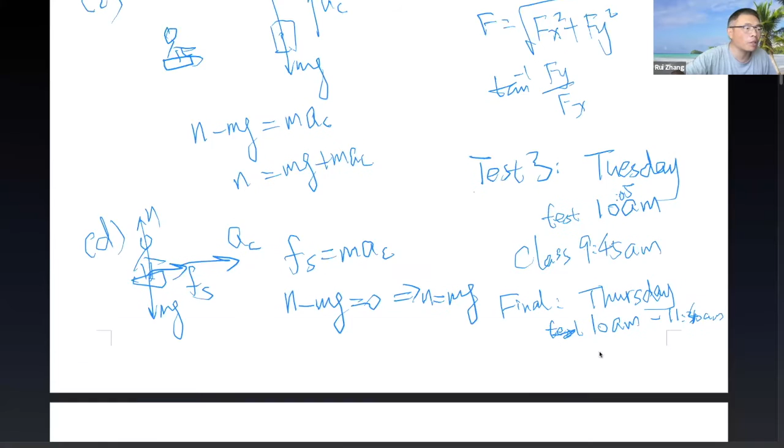So if you look at the book, chapter 9, the title is fluid and solids. Roughly speaking, the first section talks about states of matter, then two quantities called density and pressure, then pressure difference and buoyant force, fluid motion, and other applications. Up to here is all about fluid, and then the last three sections talk about solid.

So in this class, I'm going to talk a little bit about the fluid, to give you guys an outline about what the fluid is about. I'm going to try to use the rest of today to do that.

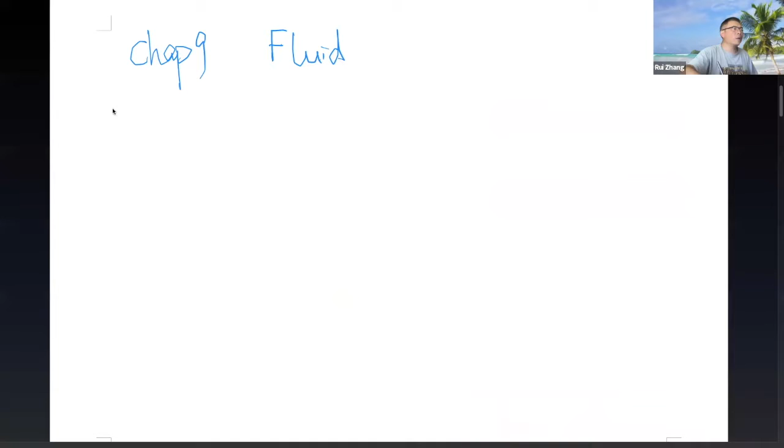So let me talk about fluid. First thing, we need to talk a little bit about the states of matter. It turns out that for the same kind of material, it can stay in different states. A very good example is a very common material we have every day, which is water.

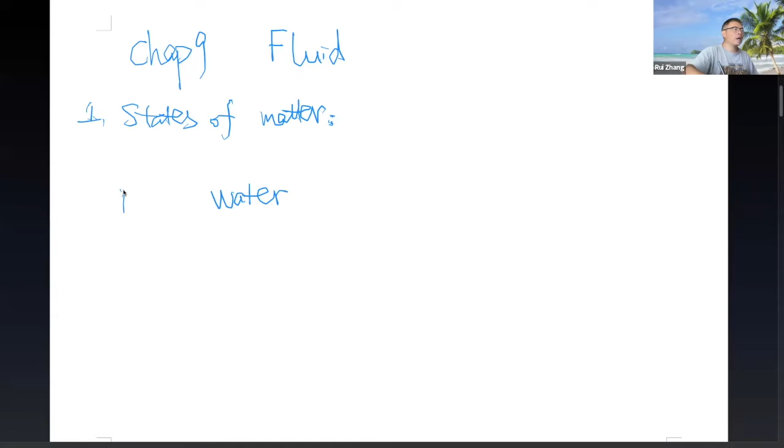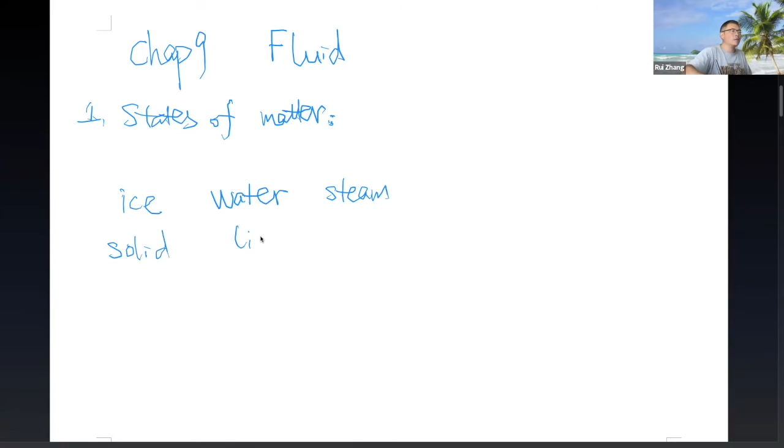As we know, if you put water in the freezer, it becomes ice. And if you put water on top of a stove and heat it up, it becomes steam. So these are the same object, same material, but different states. This is called solid, this is called liquid, and this is called gas. These are the 3 common states of matter. Sometimes they're called phases, so you could say every material has at least 3 different phases: solid phase, liquid phase, and gas phase.

These two together, liquid and gas, are sometimes called fluid. So when they talk about fluid, they mean liquid and gas. And then we have also solid here.

Now what induces this change of states is the temperature. As you increase the temperature, material will go from the solid phase to liquid phase and to the gas phase. This is true not only for water, but for everything else as well. Like the metals you use, they are solid at room temperature, but if you increase the temperature a lot, like to a couple thousand degrees, it's going to melt to liquid, and if you increase even higher, it's going to become gas. So all materials are like that, it's just the different temperatures at which this phase transition happens are different.

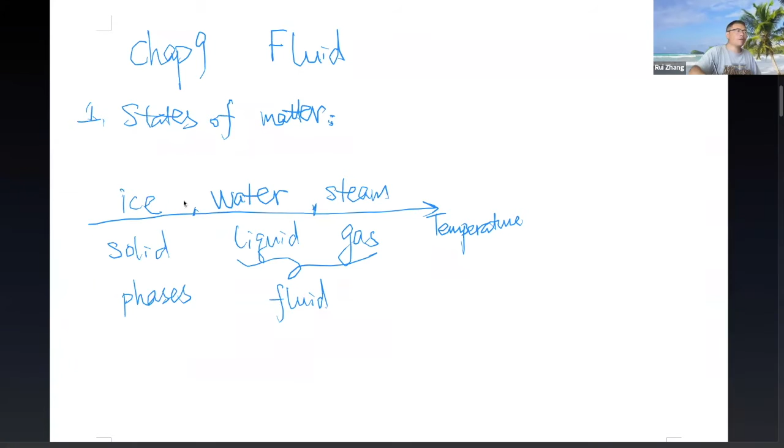So anyway, we don't need to know a whole lot about this. There's definitely physics you can talk about here, this is related actually to chapter 10, chapter 11, chapter 12, when we talk about thermodynamics and thermophysics, they're related to temperature. What determines these phases essentially is the microscopic interactions between the atoms or molecules in the material. As temperature goes up, those molecules move faster and faster, so it breaks those solids into liquid and then into gas.

Anyway, let's talk a little bit about fluid. So to study fluid, basically it's liquid and gas. There are two fundamental quantities we need to introduce, they're called density and pressure.

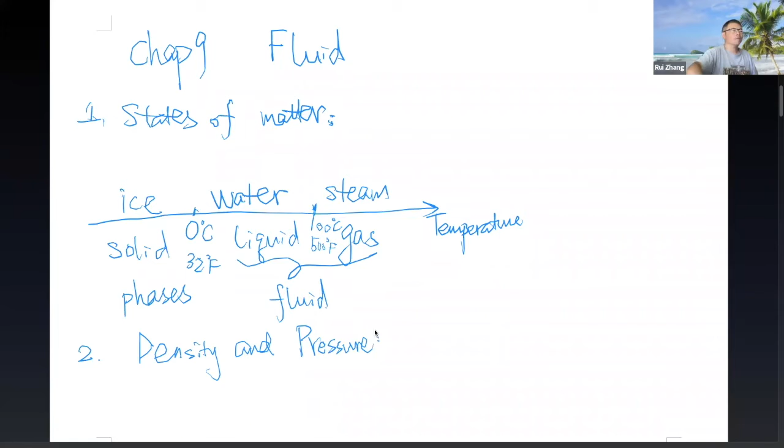So the definition of density is pretty simple. Normally people use rho - it's not P, it's a Greek letter, rho, okay? Defined as rho equal to m over v, mass divided by volume.

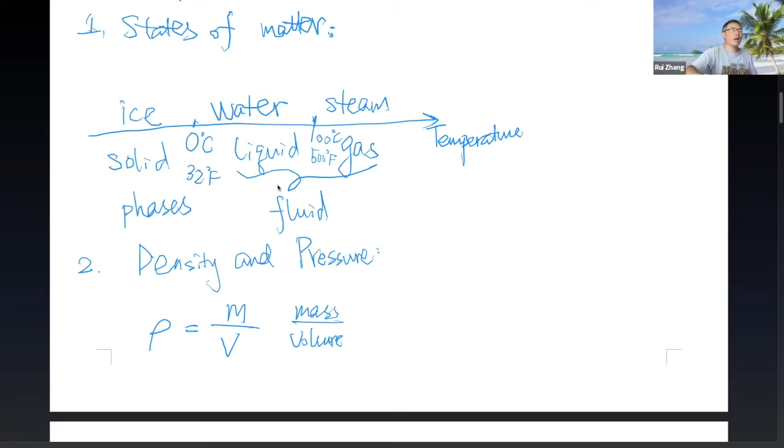So density basically is a mass per unit volume thing. And as the definition suggests, it tells you how dense the material is. So if you have the same volume, the bigger mass you have, the denser the object is. Mass is in kilogram and volume is in meter cube, so the unit for density is kilogram per meter cube. It is a scalar because there's no direction associated with it.

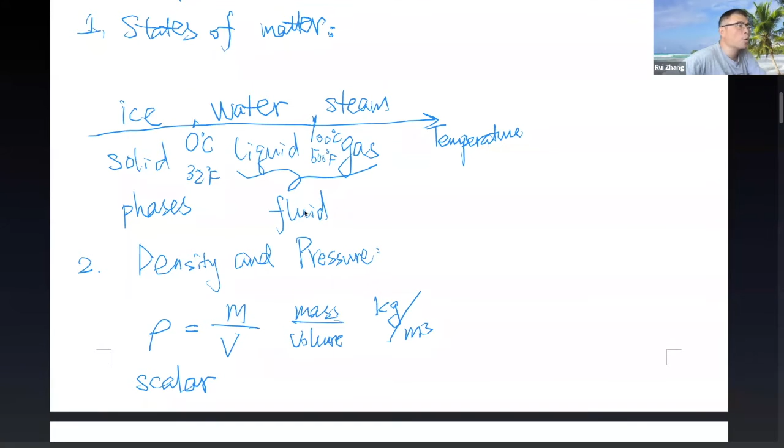Okay, let's go back to this. So this is the first quantity, density - a very useful quantity to describe the property of fluid. And the second quantity we need is called pressure, denoted by the letter P. It's defined as force per unit area.

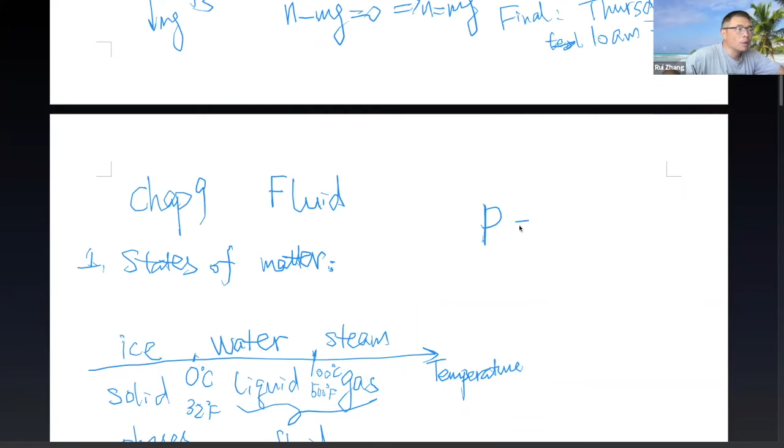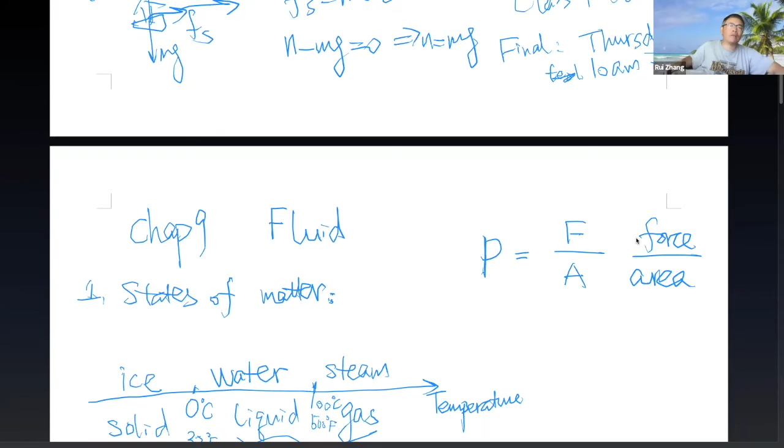So we have force divided by area here. When we talk about pressure, it's kind of like force, but it's not the force - it's force per unit area, so it's like how much force you apply to a specific unit area. This is a very good quantity to have because it tells you the property of the material, like how sustainable it is to pressure, to force. The unit for force is Newton, unit for area is meter square, so it's Newton per meter square. There's a special name for that - it's called Pascal, which comes from a physicist that studied a lot about pressure.

So how do we understand why pressure is very important for us? For example, think about this: you walk where there's snow on the ground. Now you try to walk on the snow - if you just walk barefoot, or with normal shoes, you see that your feet go into the snow.

If you wear a ski board or something, you're going to stay on top of the snow. What's the difference? In both cases, the force on the snow is basically equal to your weight. Actually, in the ski case, you have even slightly larger force because there's the weight of the ski as well.

But why do you sink into the snow in the first case while you don't in the second? It's exactly because of pressure. Same force, but the contact area in the first case is just the surface of your shoes, while in the second case you have the ski board, which is way larger. So the pressure in the second case is way smaller than the first case.

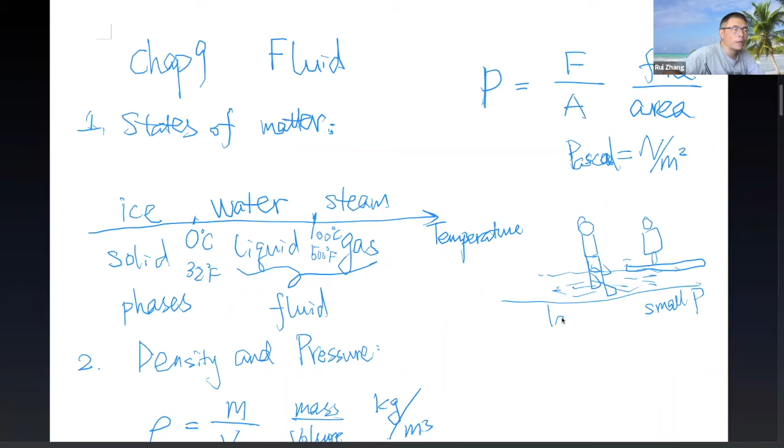Another interesting example is the so-called bed of nails. If you go to a science museum, like in Oklahoma City, and some other museums, they have a bed of nails you can use. The idea is you have a bunch of nails that make up a bed like this, and you can definitely lie onto it.

You can lie on it like this, and even though they're nails, they do not go into your body. It's because your whole weight is spread out. If you add up all the surface areas of all the nails together, they have a pretty decent total surface area, so the pressure is not actually very large. So you're good.

Now consider another case: imagine you only have 2 nails underneath yourself. As you can imagine, this is not going to end up good - you'll probably get some blood or something, because instead of having thousands of nails underneath, you only have 2. The surface area is significantly smaller than before, so this is not good. This is a really large pressure case, versus small pressure in the other case.

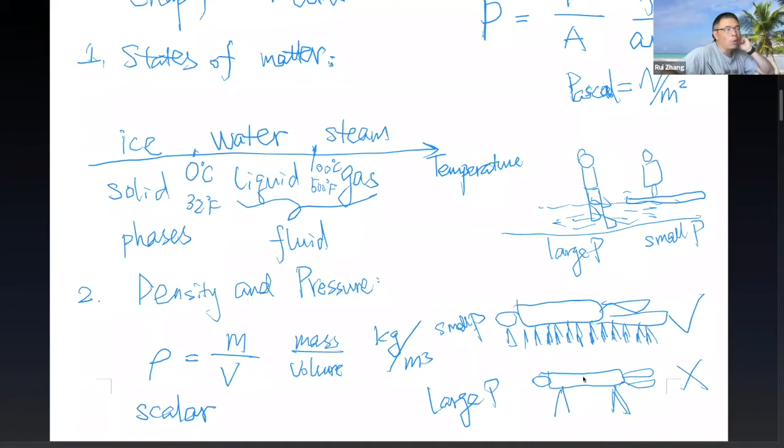This again tells you why the quantity P is useful and important, because in a lot of cases the force you have is kind of the same, but you want to reduce the pressure in order to keep yourself safe or to achieve certain functions. So those are the two examples.

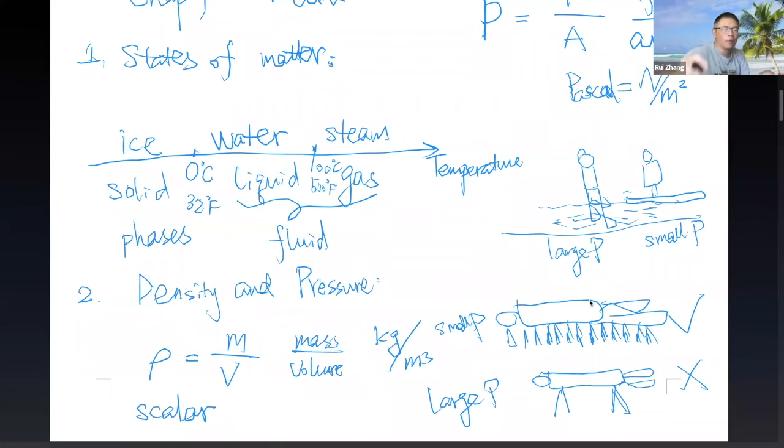There's another thing with the same idea. Say in winter you go onto a frozen lake, and this is ice. Suddenly you realize the ice is not thick enough, so it's starting to break because of your weight. What do you do? You should try to lie on the ice and then crawl a little bit towards the bank. Again, why do you do that? You're trying to reduce your pressure.

If you're standing, there's only 2 feet, so the surface area is determined by your shoes. But if you lie down, you have your whole body as the surface area, increasing the surface area by at least 10 times. So the pressure becomes 1/10. It's much more unlikely that the ice will keep breaking when you lie down like this, compared with standing. That could be really useful - this is about cracking on the ice.

I think that's sufficient - both of these quantities are pretty simple, and there's some calculation you can do for the pressure, but it's basically using the definition of pressure, force divided by area, to calculate it. You can take a look at example 9.1 if you want to, but it's a pretty simple thing. So next topic, let's talk about pressure in the fluid - that's probably the first important topic in this chapter.

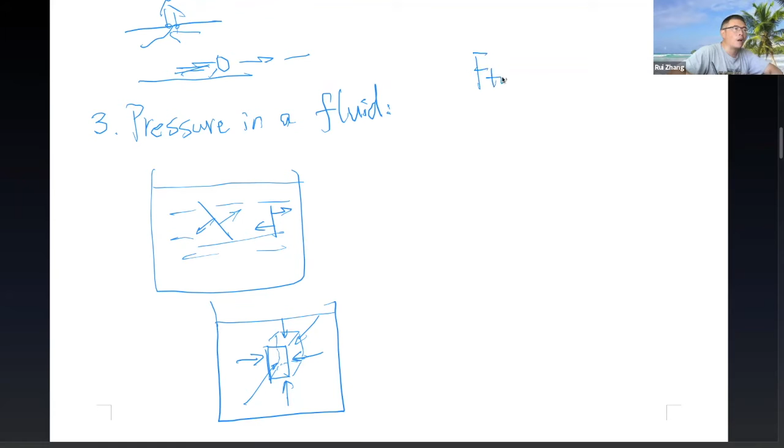I'll call this P top. On the top, the force from the top is given by the pressure on the top times the surface area A. And from the bottom, you have F bottom equal to pressure from the bottom times, again, area A.

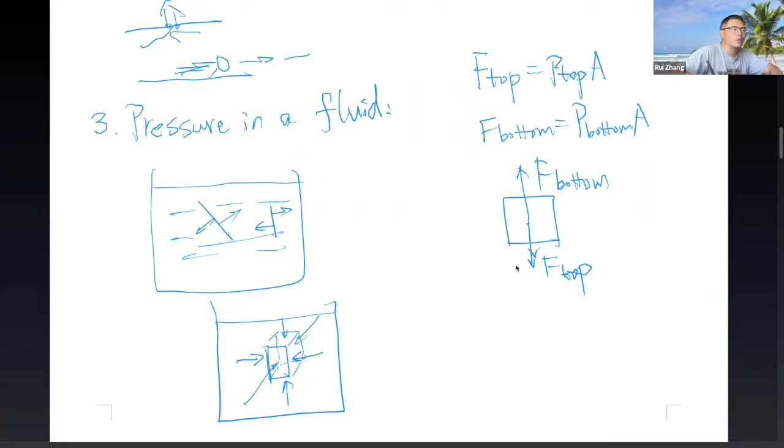Now, if you do a free body diagram for this object, on the vertical direction, you have 3 forces. First, you have F top going down, then you have F bottom going up. But remember, there's always gravity, so there's going to be weight as well going down. Let me call it mg.

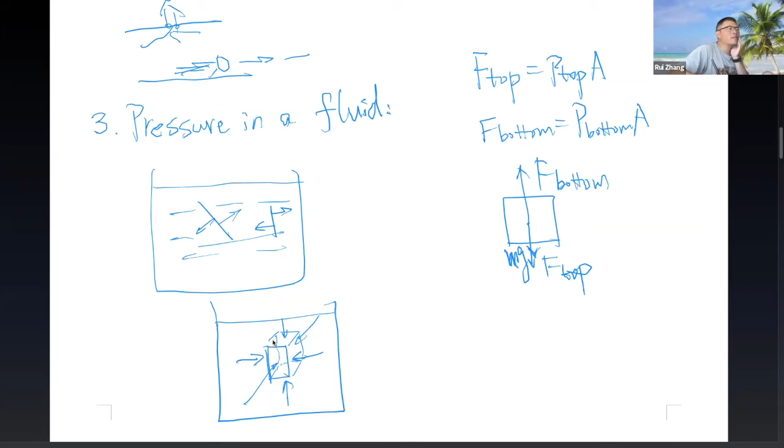This part is the box. Let's just say this is the box of water you have, just part of the water. This water certainly can stay at rest, and it is actually staying at rest for most cases. So there's no velocity, there's no acceleration on this water.

So the 3 forces have to balance each other. You have F bottom minus mg minus F top equals 0. If you plug this in, you have P bottom times A minus mg minus P top times A equals 0. Now if you move this term to the right and divide by A, you have P top...

I'm sorry, I got it wrong here. This should be opposite. This should be P bottom. This should be P top. So you have P bottom minus P top equals mg over A.

So you see there must be a pressure difference on the top of this part of the water and at the bottom of this part of water. The reason for that is because water itself has weight. In order to hold the water there, you need to have a larger pressure from the bottom than the pressure from top.

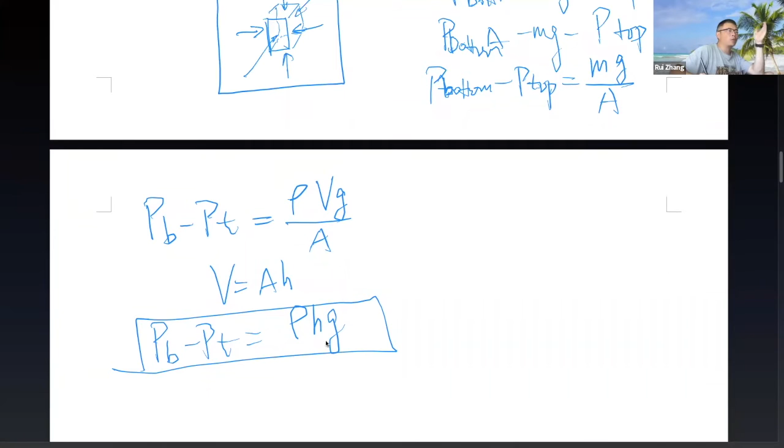That's a very important formula. It tells you the pressure difference of these two surfaces. Now the way we derive this formula is kind of specific, but actually it's a very general formula. We can apply it to almost every case in the fluid.

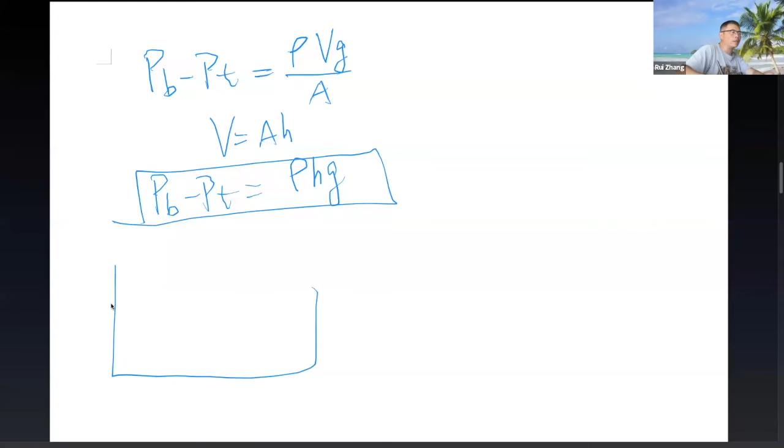For example, consider a container, the sea here. If you ask what is the pressure on the top of the sea, well it's P top, right? There's no fluid anymore here, but there's air pressure. The air pressure is normally called P naught, the pressure in the atmosphere you have.

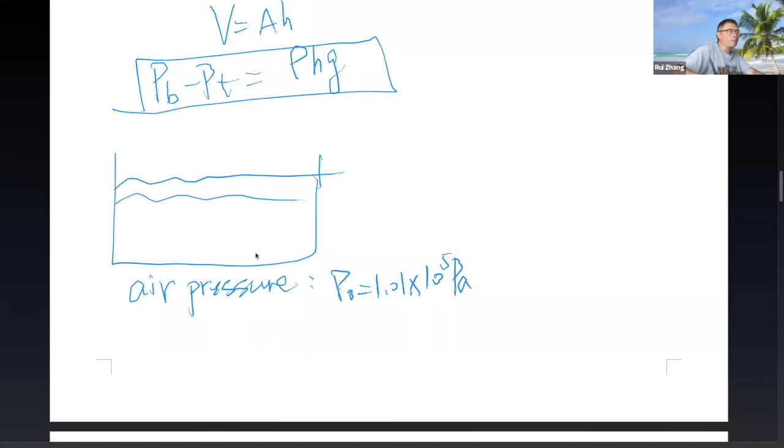So that's normally we call P naught, which is 1.01 times 10 to the fifth Pascal. This is the unit we just learned. So in this case, the pressure in any given position equals P0, P naught, plus rho Hg, where rho is the density of the water and H is the depth of the water. This gives you a measurement of how the pressure changes when you go to certain depths of water.

As we know, if you go scuba diving, human beings cannot go beyond certain depths of water without wearing something like a very solid iron or metal suit, because the pressure is proportional to the depth. The deeper you go, the bigger the pressure will be, and it goes pretty fast.

For example, let's say if you go to 100 meters. If you plug in the numbers for water, for H equal to 100 meters: rho Hg equals 1.0 times 10 to the third kilogram per meter cube times 100 meter times 9.8 meter per second square. This is roughly 1.0 times 10 to the 6.

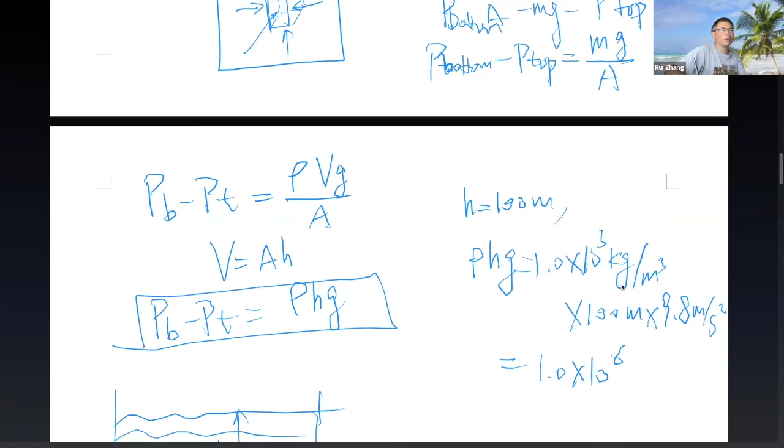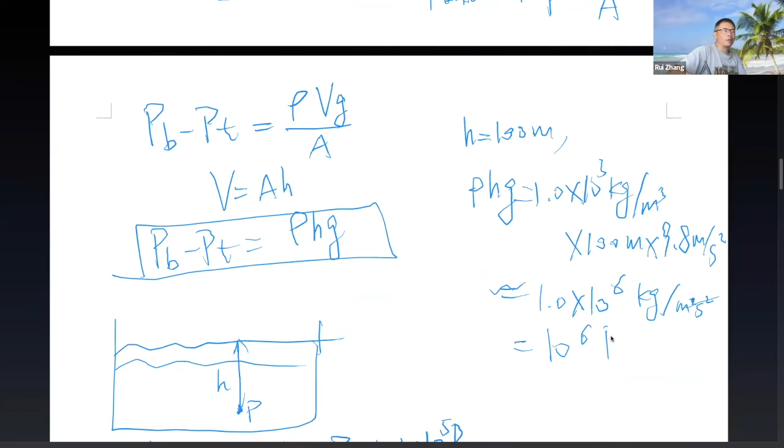This gives you the unit of kilogram per meter square and second square, with another meter, which is just the unit for Pascal. So for 100 meter depth, you have about 10 to the 6 Pascal. That's already about 10 times larger than the atmosphere, so it's pretty big.

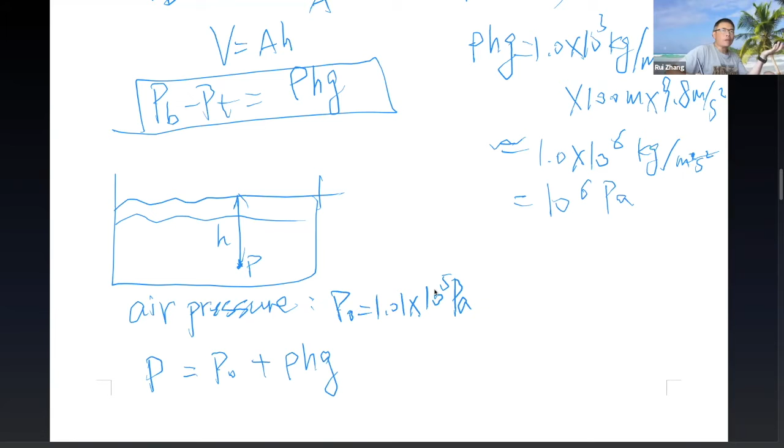The atmosphere, we don't feel its pressure because there's air everywhere - inside of us and outside of us, so we don't feel this air pressure, except in some very special cases.

For example, when the plane takes off from the airport, when the plane goes up, you feel kind of uncomfortable on your ears. The reason is there's a sudden change of height, so the pressure actually decreases as you go higher. That sudden change means your body is not adjusted to the new pressure, so you feel uncomfortable on your ears. Same thing when you drive in the mountains, sometimes you go really high or really low - when there's a sudden change of altitude, you feel that pressure as well.

The same thing goes for the air. If you're on the surface of the earth, we know there's air above us, something called the atmosphere, a certain layer of atmosphere. So where does this air pressure come from? Again, we can use this formula to calculate it.

On the top of the atmosphere, certainly there's no air, so the P top here would be 0. The P bottom here is actually the P naught we're talking about. So P naught, roughly speaking, equals P top, which is 0, plus rho h g, but this rho here is the density of the air. From there, you can calculate the air pressure as well.

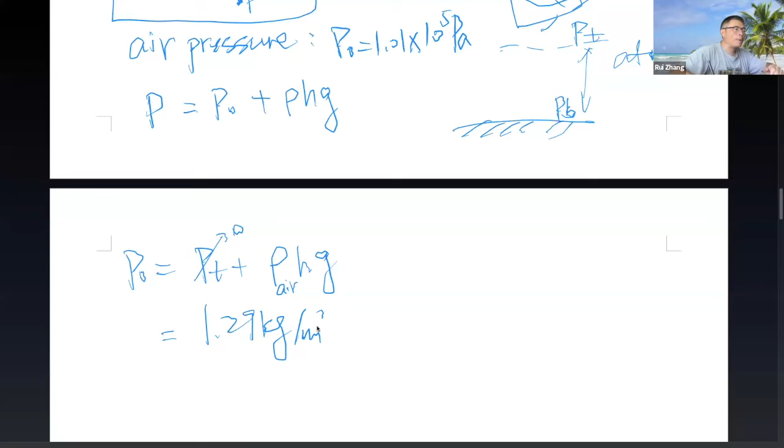The density of air, as we know, is given by 1.29 kilogram per meter cube. What about the height of the atmosphere? You can find it - roughly 480 kilometers, so times 480 kilometers, or 480 times 10 to the third meters, and then times 9.8 meter per second square. From there you can roughly estimate this P naught.

Let me do a calculation using the calculator: 1.29 times 480 times 9.8, and then we have a 10 to the third. So you got basically 6.07 times 10 to the 6 Pascal. Well, this estimate was not really a good estimate.

I got a question here. Oh, okay. Yeah, that's fine.

Okay, I'm going to answer the question after I finish this. So as you see here, I got a really large pressure compared with this one.

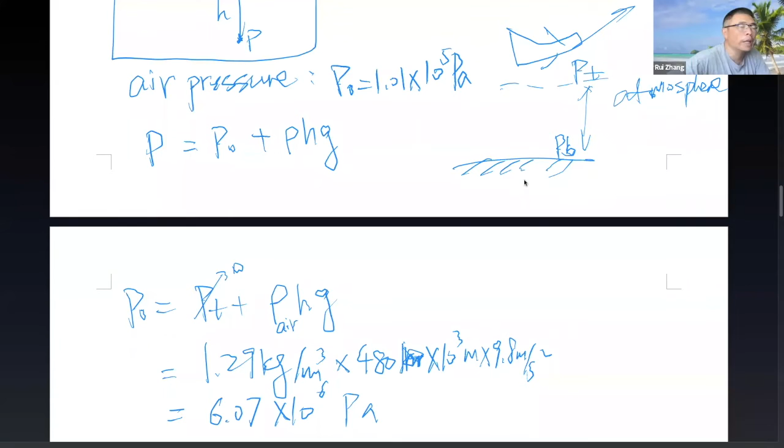Now the reason for that is actually air is a gas, so it's not like a liquid. Liquid is kind of, most liquid is incompressible, meaning that the density of liquid stays roughly constant. Well, gas is way sparser than liquid, so it's actually compressible, meaning the density here is not really constant.

Turns out that as you go up, the density of the air is not 1.29. It's getting smaller and smaller and smaller. So this density is mostly for the density around the surface of the earth. So the number is actually going to be way smaller than this number, a real smaller number compared with this value we estimate.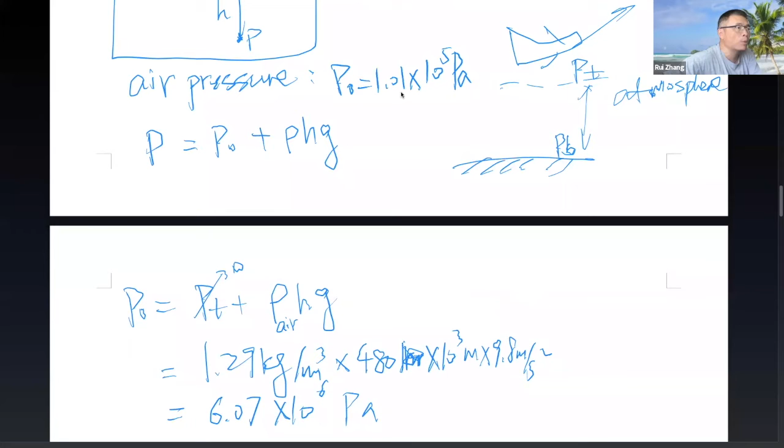It turns out that the pressure we have is about 1.01 times 10 to the fifth instead of this number that we estimated. Okay, but anyway, you see how this formula works.

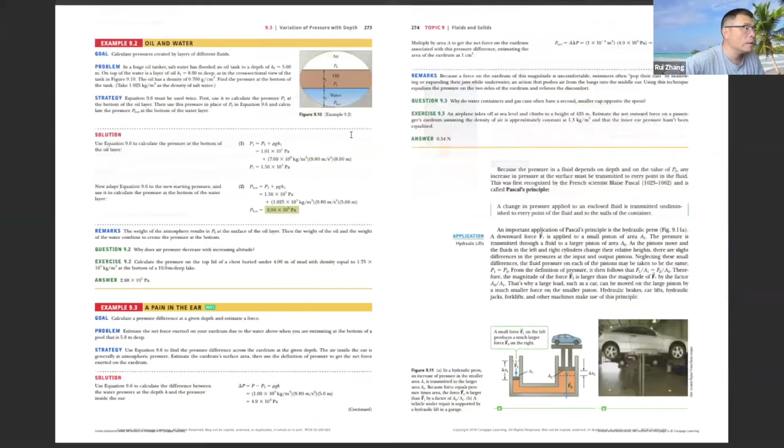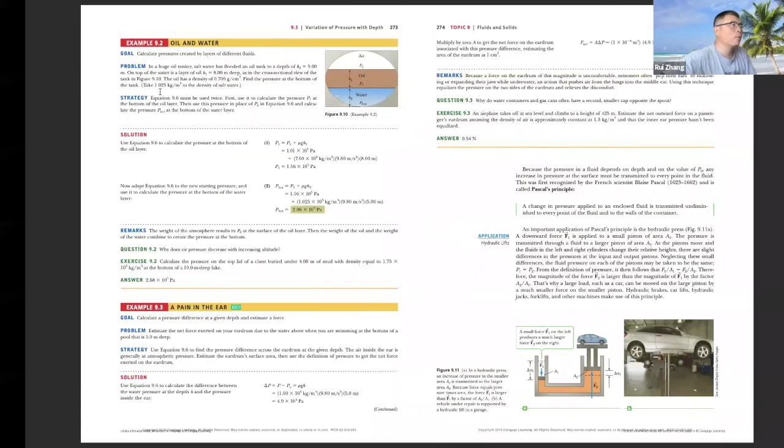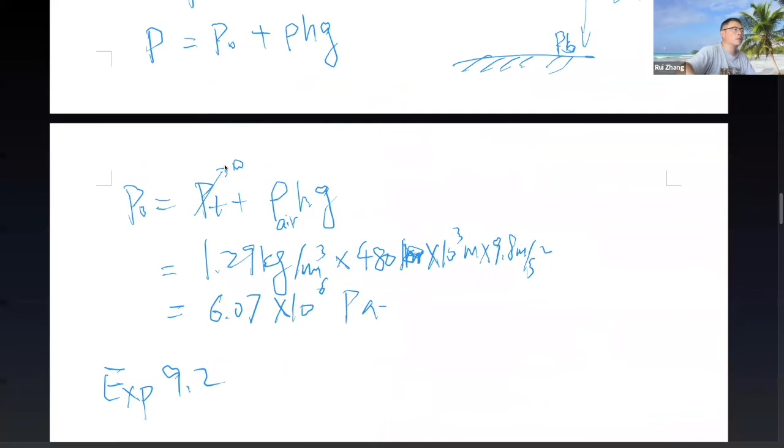And again, we don't have time to do it, but there's some exercise you can do for this pressure difference. So normally I would try to do example 9.2. That would be a good example. The car lift is kind of similar, but focus on example 9.2. We don't have time to do that, but let me write it down. Example 9.2. Well, the first part here, you can do, and you can also do example 9.1.

Okay, here I got a question a minute ago. The question is, how are we supposed to label the units for radius? Is it radians? Certainly it's not. Radius is a length, so the unit is meter, okay? Radian is for angle, not for the radius, okay? If you have angular speed, it's in radians per second, but radius is just the length, okay? It's just like meters, okay.

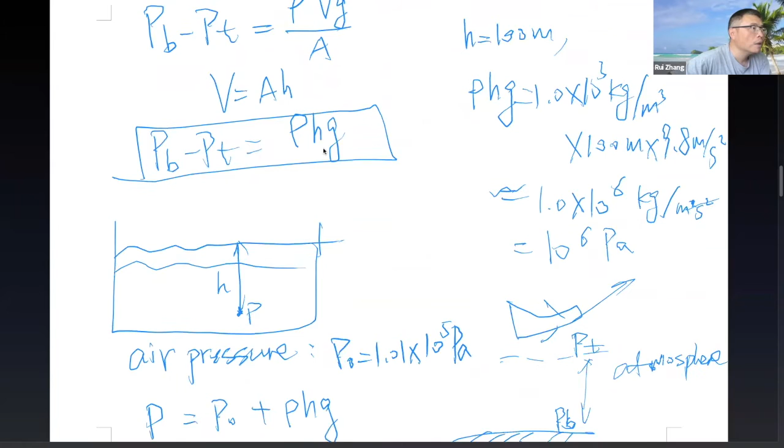So we're done with this pressure difference, okay? And again, as I said, it's important. If you do this example, you probably can see a little bit better some other example. You can also do some exercise. Now let's move on to the last one, number 4, yeah.

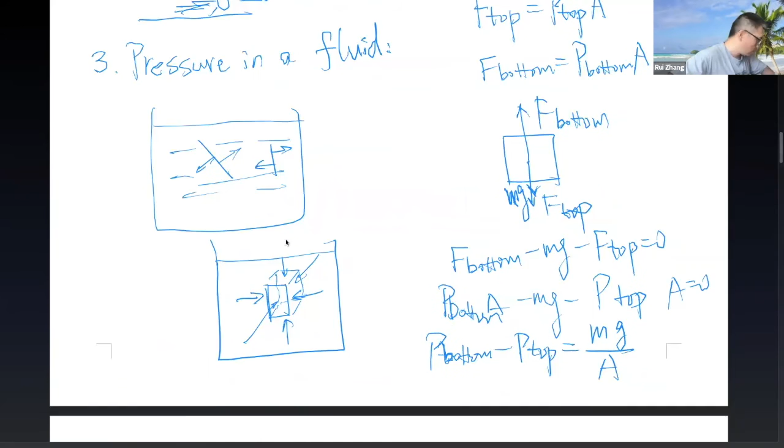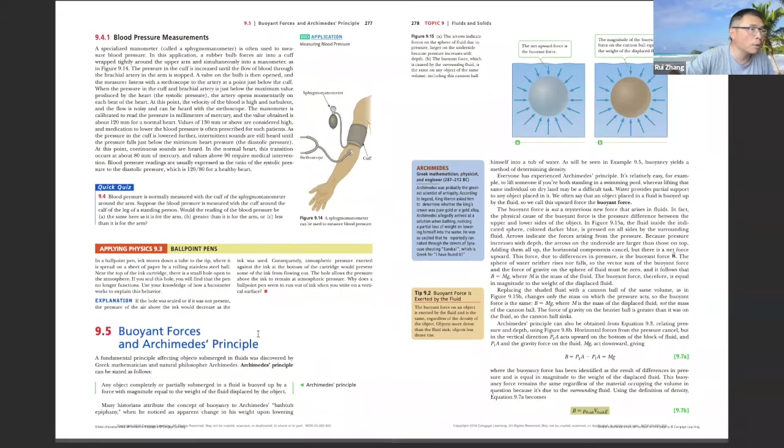Buoyant force, okay? And this one actually is not totally new. We don't need this pressure measurement for it. So buoyant force and Archimedes' principle, okay? This is not totally new, it's related to what we talked about. So what is a buoyant force? It's a very important thing, right? Sometimes we call it Archimedes' principle.

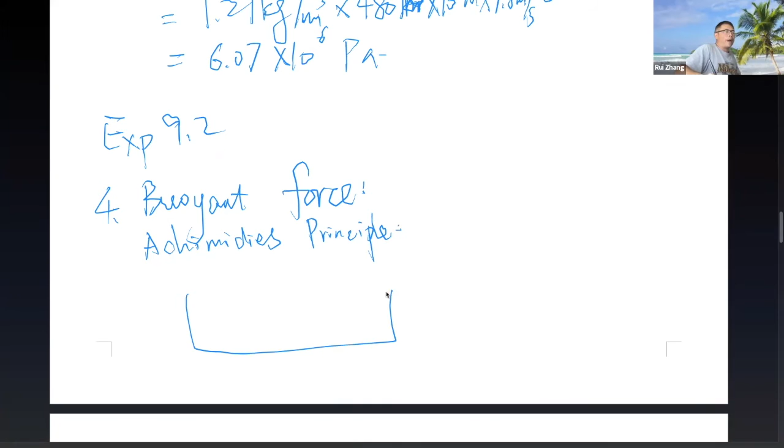So the buoyant force is something when you take a bath, you know, maybe as a kid, you notice when you throw something into the bathtub with water, certain things float on top of it, like a rubber duck or something made of plastic. But something else will fall directly to the bottom, like a metal piece of stuff, they fall to the bottom. So the question is why certain objects float on top while some other objects sink all the way to the bottom.

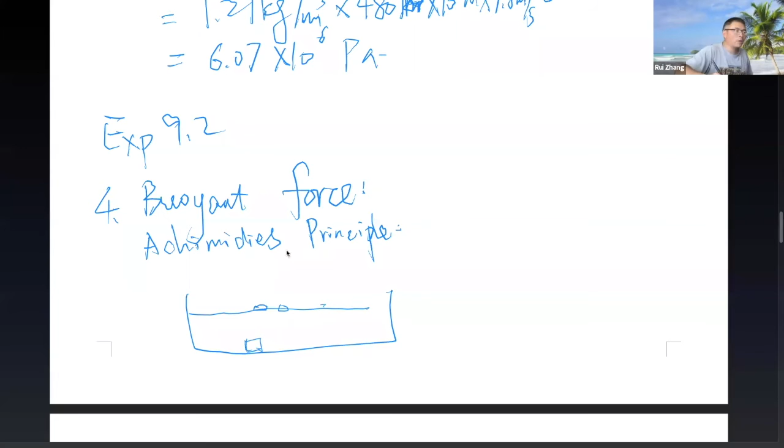That is actually because when you're in the fluid, there's something called the buoyant force, and the buoyant force is related to the density. So that's why you have the difference here. So what is a buoyant force? There's actually nothing special, we can use the same idea we just learned from here. So this time consider a tank of water.

Now consider not a rectangle box of water itself, but let's say you put something into this box, into the water. You have an object into the water here, okay? Now you want to calculate the buoyant force on this object. How do you calculate it? You can use the idea of pressure difference here, okay? Again, all the pressure from the sides will cancel out. There's the pressure from the top and pressure from the bottom, and that's gonna give you the difference here.

So the pressure on the top, as we know, is given by, okay, the difference between them. Let me write it like this. So basically you have force from the top, F top, and then force from the bottom. That's basically coming from the pressures, right? So the buoyant force, FB, essentially equals F bottom minus F top, okay?

Which is equal to P bottom times A minus P top times A. Well, as we know, this is P bottom minus P top, times A. What is P bottom minus P top? We already have this formula here, it's given by rho Hg. So let's plug that in: rho times H times G times A.

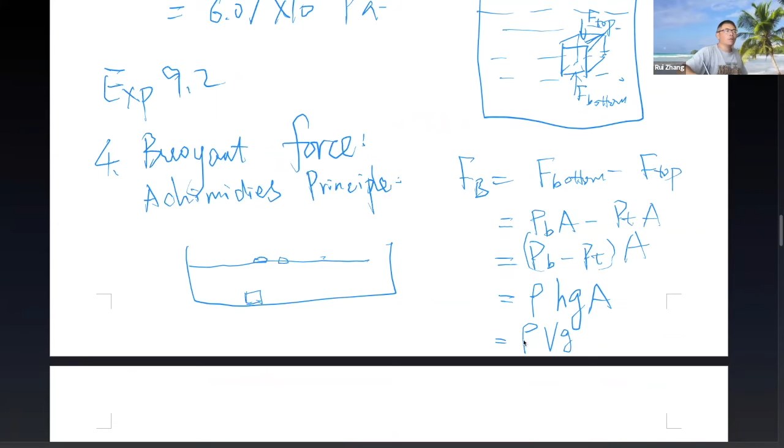H times A is nothing but the volume. So in the end you got rho, V, and G. So the buoyant force is given by density times volume times G. But it's very important to realize that this density is not the density of the object, but the density of the fluid. And the volume here is the volume of the object in the fluid, so I'll write V fluid as well. And then you have G. So that's the formula for the buoyant force.

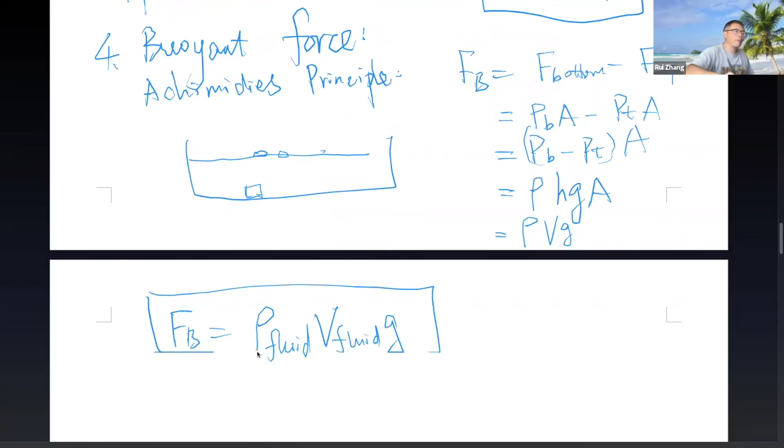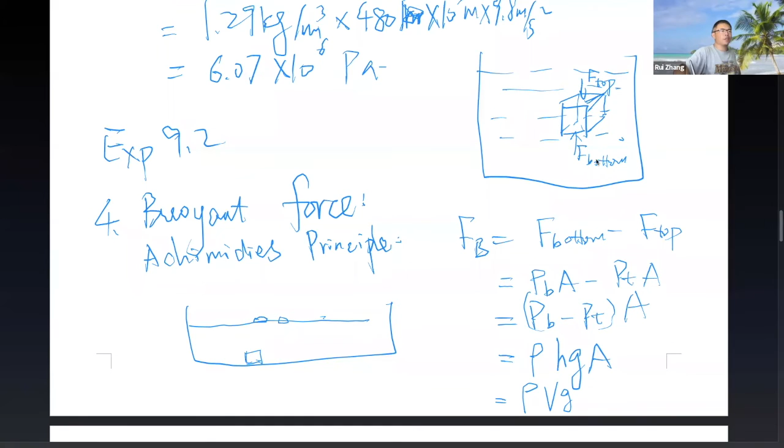Again, as I explained, this is not totally new, because this just comes from the pressure difference of the liquid you have. Now, this force was first discovered by Archimedes.

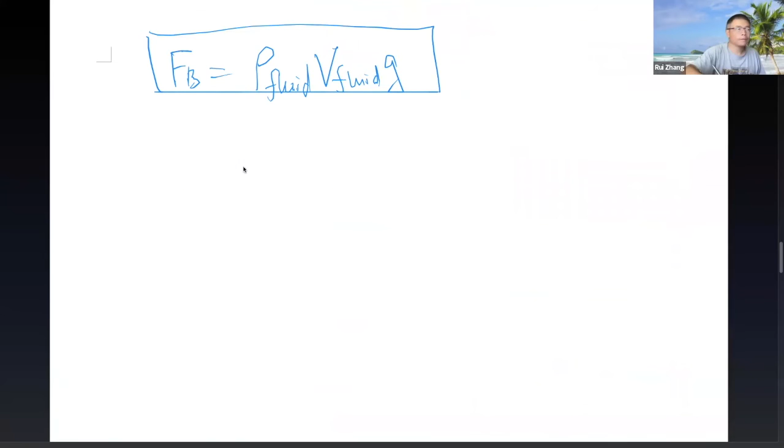So, let me see, Archimedes lived in ancient Greece, long time ago, 2,000 years ago. At that time, there was no Newton's law, no Newton's universal gravitational attraction. How did he discover this?

Actually, it's a very interesting story. He discovered this because he was assigned a job from the king. The king had a crown made by goldsmiths. He gave the goldsmiths a bunch of gold and asked them to make a crown out of it. Now he got the crown back, but he doubted that the goldsmiths didn't use all the gold he gave them, but used something else to make the crown. So he wanted Archimedes to find out whether this crown was totally gold or something else.

Well, without breaking the crown. Well, if you could break it into pieces you could check and maybe find out there's some other material in there. But certainly that would be a waste if the crown is made of gold, right? It would ruin the crown. So he doesn't want to ruin the crown but also find out whether it's made of gold. So it's a very challenging job for Archimedes.

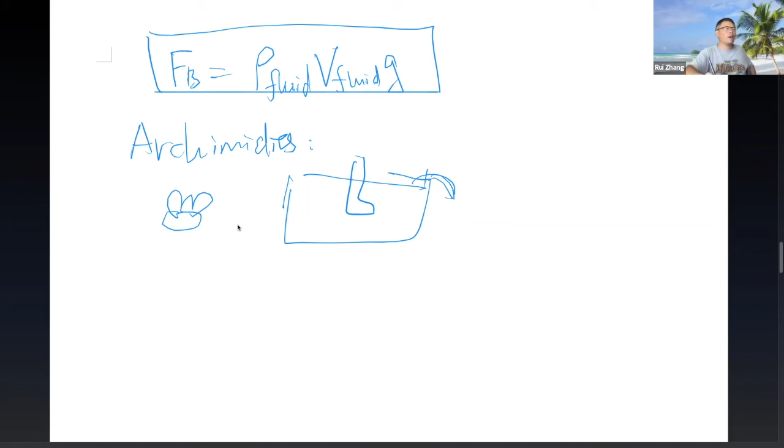So Archimedes was thinking about this problem. One day he went back home and wanted to take a bath. So he stepped one of his feet into the bath, and he observed a certain amount of water going out of the bath. At that time he realized there's a smart way to figure this out. So he was yelling Eureka, or something, I forgot, I think it's Eureka, Eureka, meaning 'I found it.'

So his idea is actually really brilliant. He was saying the following: suppose you have some water, without any object, just water itself. Because the water is balanced, if you take some arbitrary piece of water, there must be a force balancing the weight, which is a buoyant force. How big is the buoyant force? Because water is at rest, the buoyant force must equal the weight of the fluid itself.

So now he's saying that if I replace this amount of water or fluid by an actual object, this object will feel the same amount of buoyant force. So the buoyant force still equals the weight of the fluid. So basically what he's saying is that the buoyant force equals the weight of the fluid with the same volume. He observed this by noticing that when he put his foot in, the same amount of water got out, because if he replaced the water with his foot, the same volume of water would come out. So this might help you understand this buoyant force: it always equals the weight of the fluid with the same volume.

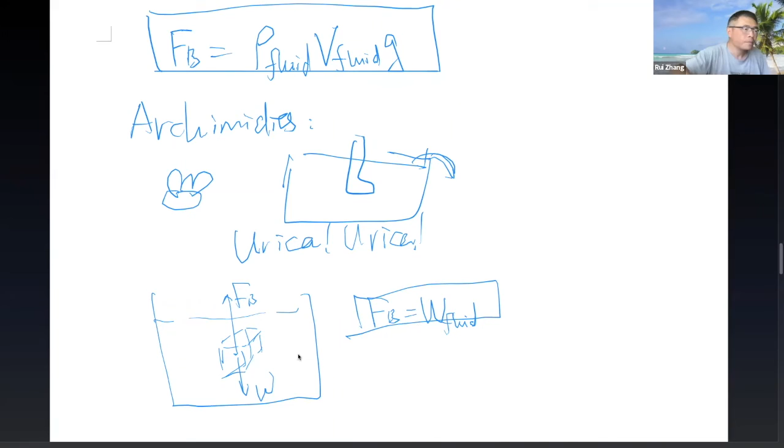So if you have something floating on top of the water, only part of it is inside the water. Only this part of volume should count, this part should not count. This is going to be your volume of the fluid, like you used in this formula.

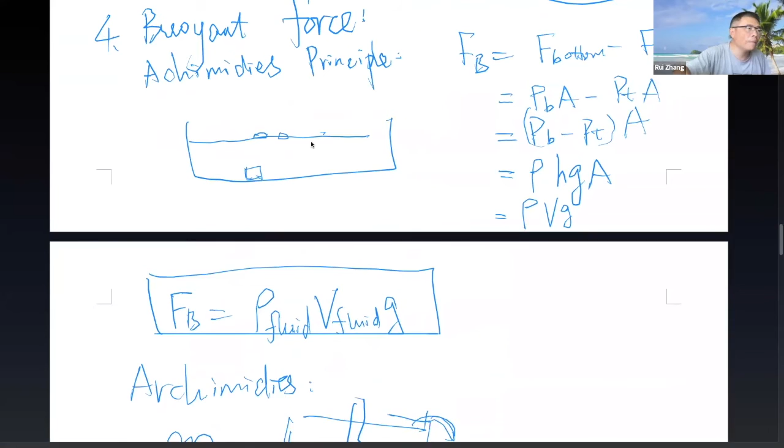Now, with this understanding, you can actually see whether some object floats on top or goes to the bottom. It's very simple. If you consider an object in the fluid, there are two forces: weight and buoyant force.

If the buoyant force is larger than the weight, the object certainly floats on top. If the buoyant force is smaller than the weight, the object is going to sink. So you just need to compare these two forces. How do you compare it?

For the buoyant force, you have density of the fluid times the volume of the object in the fluid times g. That's your buoyant force. Your weight, mg, equals the density of the object times the volume of the object times g.

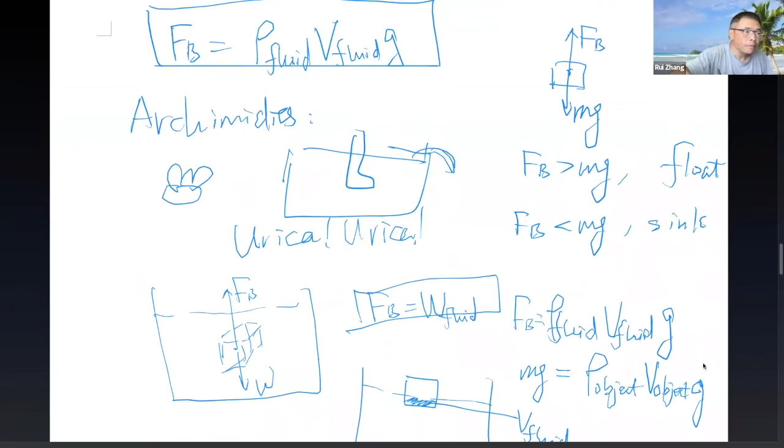When the object is totally in water, the volume inside the fluid is the same as the volume of the object, so these are the same. Essentially, you need to compare just the density of the fluid to the density of the object.

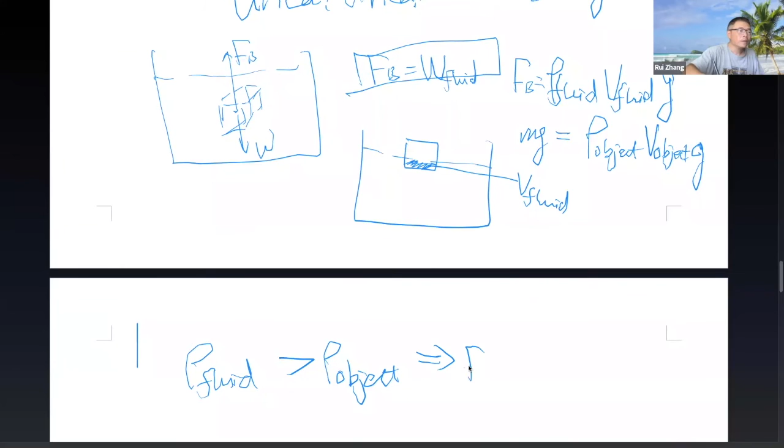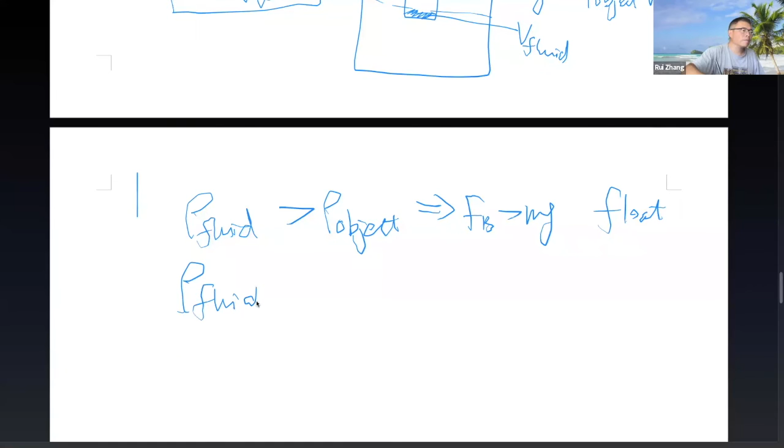These are the critical things. If the density of the fluid is larger than the density of the object, the buoyant force would be larger, so the object is going to float on top. If the density of the fluid is smaller than the density of the object, the buoyant force will be smaller than the weight, so it's going to sink. It's that simple.

So rubber and plastic, those stuff, their density is smaller than water, so they're going to float on top. Metals are heavier than water, so they're going to sink to the bottom. Does that make sense, you guys?

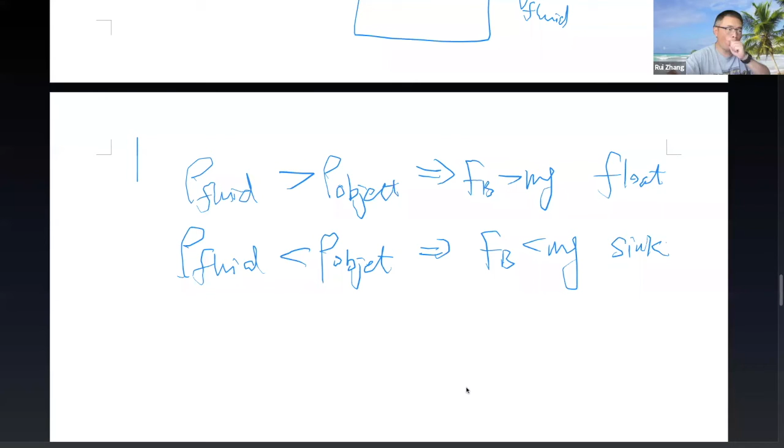You may wonder, for example, why we have ships made of metals. Those big ships are all made of metals. How come they float on top of water instead of sinking? Well, the answer is they're not totally metal.

The ship's shape has a lot of empty rooms in it, so the total equivalent density is actually way smaller because it's an average of the density of air and the density of metal. If you just have a solid piece of metal, it's going to definitely sink to the bottom. The ships float on top because there are a lot of empty rooms inside. That's the difference.

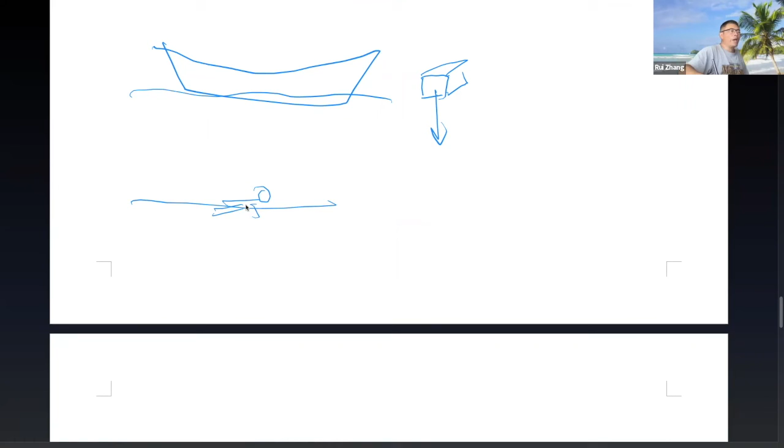Another case you can explain is people swimming. As you may already know, human beings are like 70% water. That's because all the lives on earth came from the sea, the oceans, so most of us is still like water. There's only 30% of us that is not water, so our density is actually pretty close to the density of water.

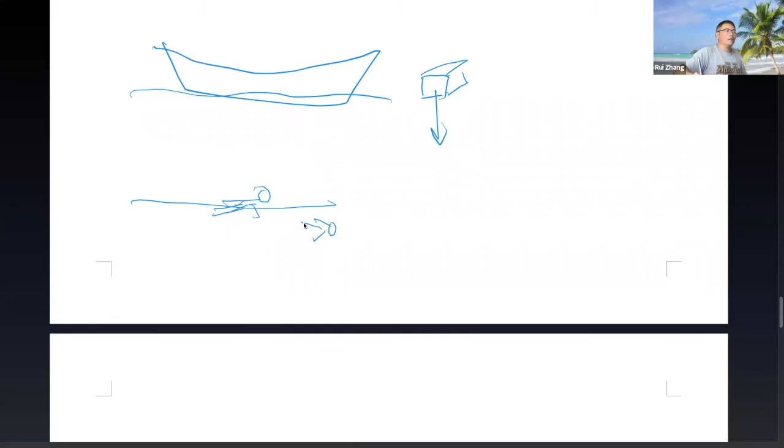They're so close that if you breathe air into your lungs, your density is going to be smaller than the density of water, so you can float on top. If you breathe out all the air, you have no air in the lung, you're going to sink. You can dive in if you breathe out. And breathe in, like this.

So that's why we can swim, why we can stay on top of the water. Even if you don't know how to swim, you should feel confident that if you breathe in, you should be able to float on top of water.

Well, I guess the real matter here is, even in that case, if you're not careful, it's not like the proper part of you is on top of the water. You may end up with your leg on top and your head at the bottom. Then that's not useful, right? One part of you is on top, but you're going to get drowned because the important part you need to keep raised is underneath. So then you're finally going to get drowned.

So the skill of swimming is to make sure you have proper balance of yourself, so you have the proper part—your mouth and your nose—on top of the water, so that you can breathe in and out on top of the water. But overall, our human bodies are really close to the density of water.

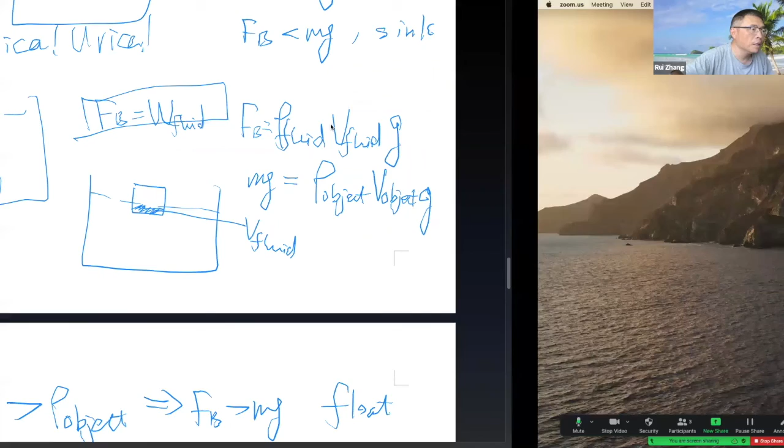Now, with this information about the buoyant force as a new force, you can solve a lot of problems with it, just like Newton's law problems. For example, in this case, you have...

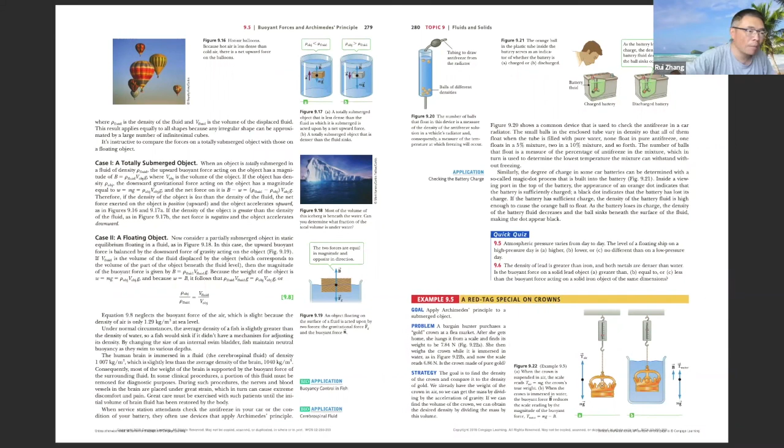This example 9.5 is essentially how Archimedes determined whether this thing was made of crown gold. Basically, he measured the weight of the crown in the air and in the water, and from there he could figure out whether the density of the crown was the same as the density of gold or not. Based on that, he told the king that the goldsmith indeed took away a certain amount of gold. So the king actually killed that goldsmith. But that's another story.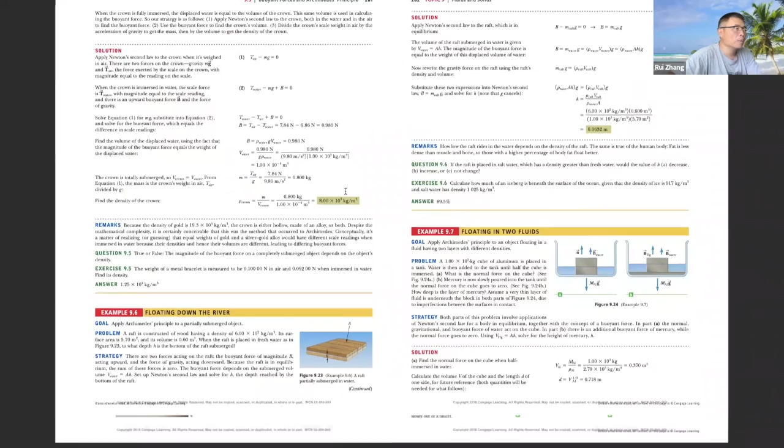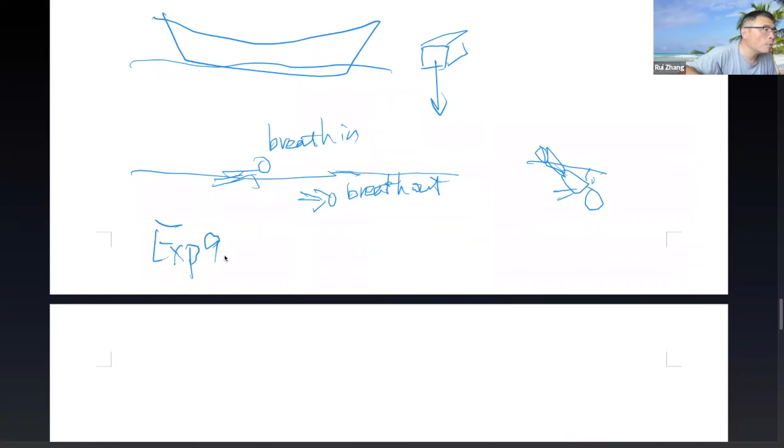I think example 9.6 is also very good because in this one, only part of the object is floating on top of the water. So you can see how you calculate the buoyant force using only the volume of the part of the body in the water. So both 9.5 and 9.6, I think, are worth studying. Example 9.5 and example 9.6.

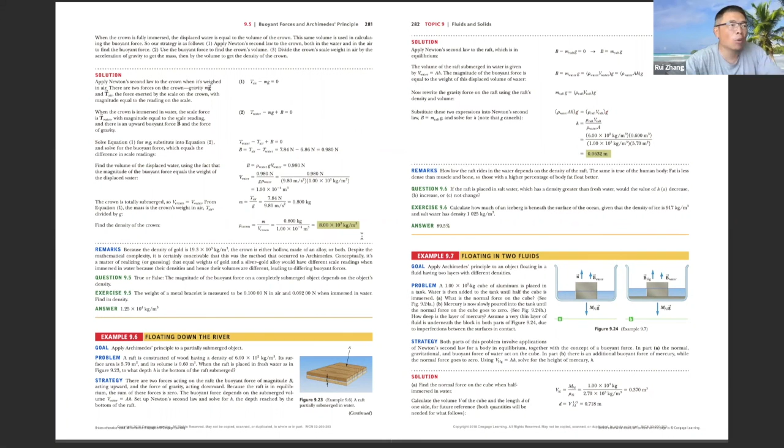Okay, so that finishes the lecture about chapter 9. I'm going through everything pretty fast because we only have this one lecture for that, and also because this is not going to be tested and we don't even have a homework for this. This is just for some people who want to take the MCAT, to help you see what's being talked about in this chapter.

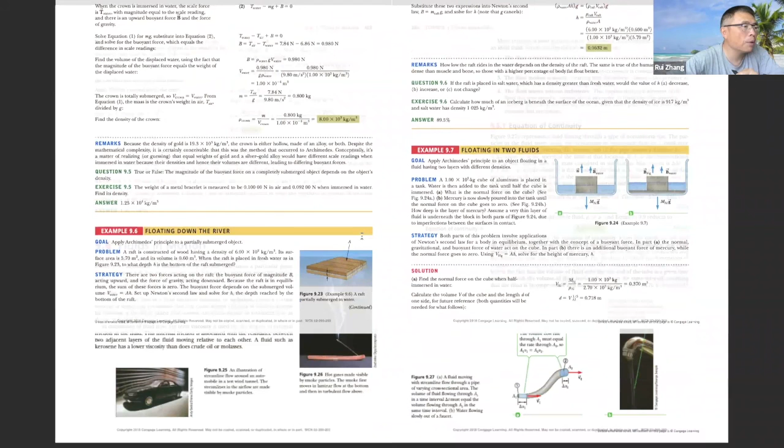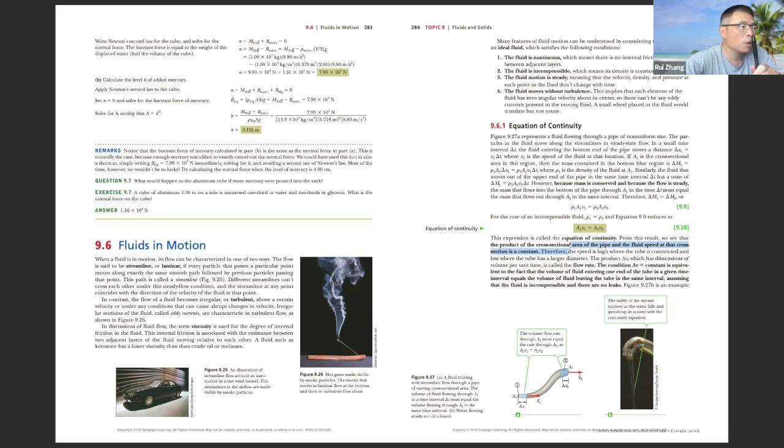Now, we don't have time to talk about the further sections, like the fluid in motion part. I think this is relatively unimportant compared with fluid statics, which we just talked about today, because normally fluid in motion is more difficult than fluid at rest. I don't know whether MCAT includes this part, but basically the important things are the equation of continuity here, and also Bernoulli's equation, like this one here, but normally they're more complicated.

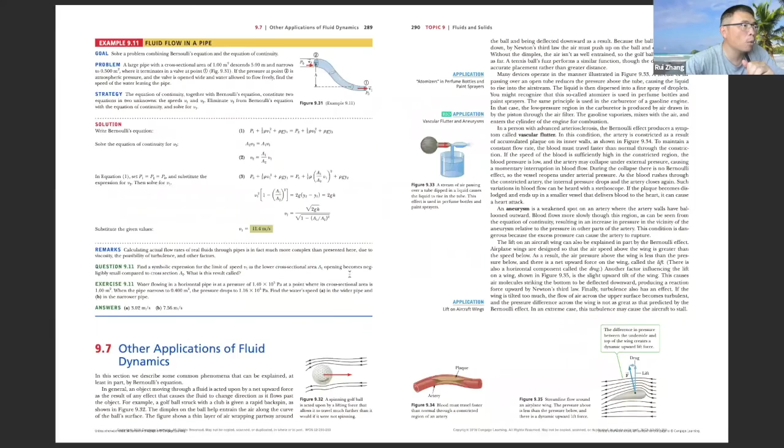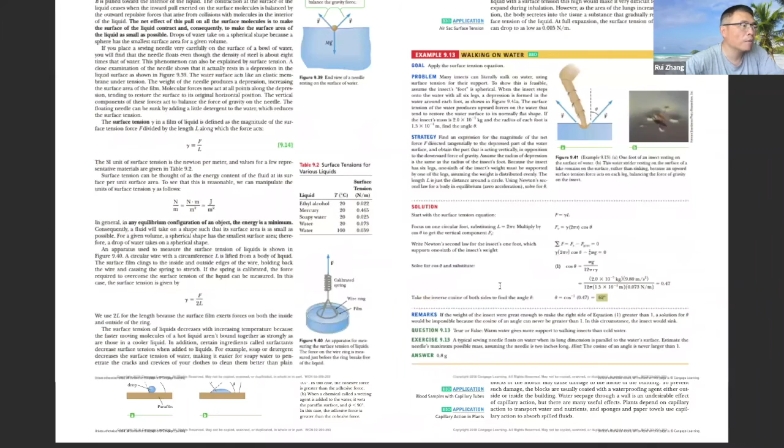And like other applications, this is even more complicated. There's all kinds of interesting things about fluid, like surface tension and stuff, but we don't have time. Capillary action, et cetera, et cetera. They're all interesting. I think these are all pretty complicated. Reynolds number and stuff, these are pretty complicated.

So, that diffusion is even more complicated. I doubt they're going to be on the MCAT, but yeah, it has all of this, the complicated part.

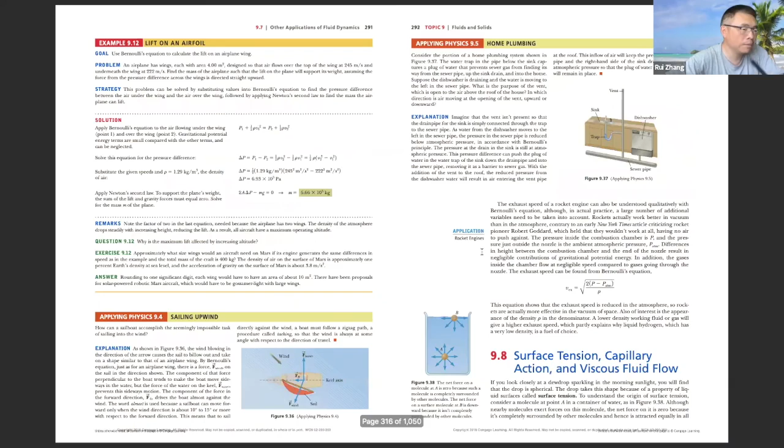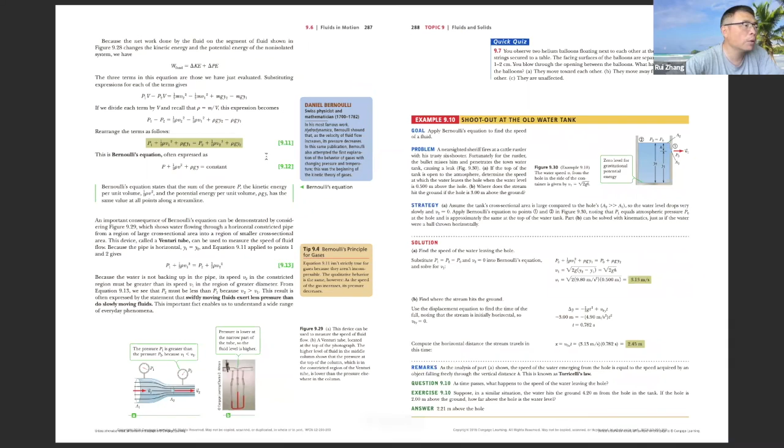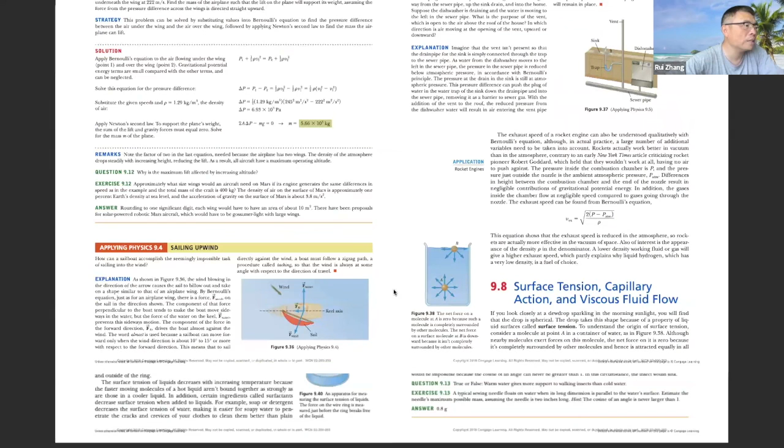We normally, even if we have time, don't cover fluid motion. But I would say in each case, focus on the principles. Like I said before, for fluid motion, focus on the continuity equation and also Bernoulli's equation. Then when you go to other applications, like the lift force or something, those are definitely complicated. The surface tension, honestly, I don't know how they test it, but you just need to understand there are certain things like surface tension you can calculate with a simple equation, but I don't really think they test that.

They tested this with blood flow. Oh, I see, okay. So blood is certainly very viscous. Oh yeah, because blood is a fluid. Yeah, I see, I mean capillary action.

I honestly think... I don't know, viscous fluid flow maybe is useful because the flow of blood inside the vessel is very viscous. I mean, it's not given. Oh, the blood viscosity is given here. See, the viscosity is 2.7, way more viscous than water. So it's like at least 3 times or even more.

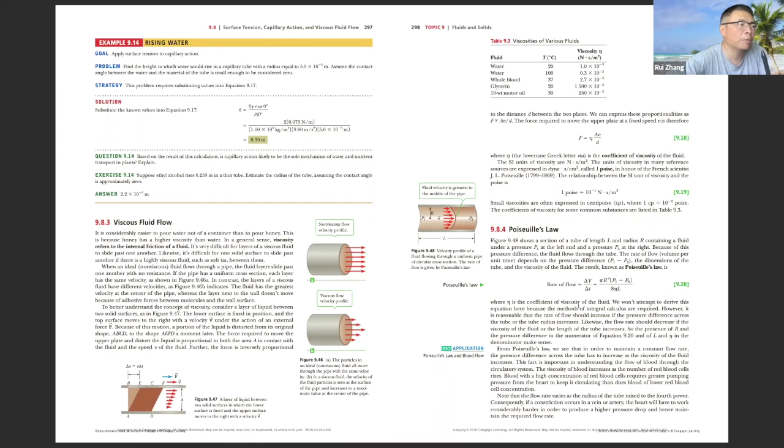Well, this would take forever to explain everything here. I guess for you guys, maybe you need to know some basic equations like this. But to understand the physics behind it, we really need the Navier-Stokes equation from fluid mechanics. For diffusion, you may want to know some basic formulas as well, maybe like this one, which is called Poiseuille's law. You may want to understand that. So yeah, there is one about the flow of blood.